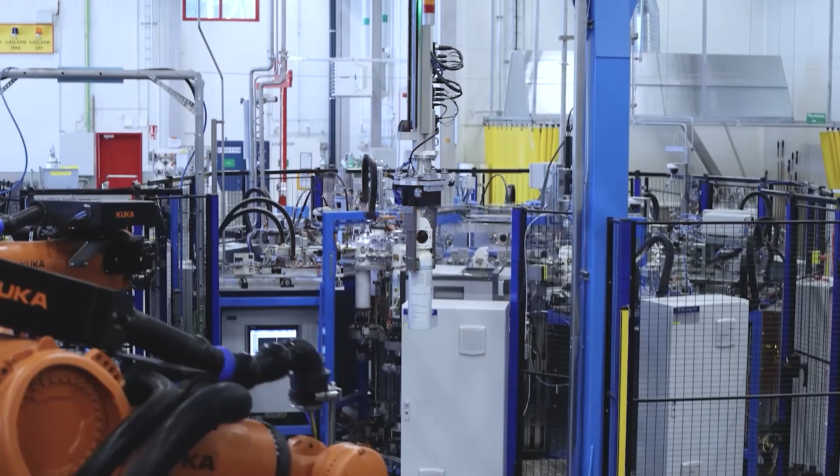Right, we've given ourselves 30 minutes to talk about a pretty big subject, so let's get stuck straight into the history, shall we? We have a long, proven, successful history of supplying gantry systems to various industries and hundreds of different types of applications.

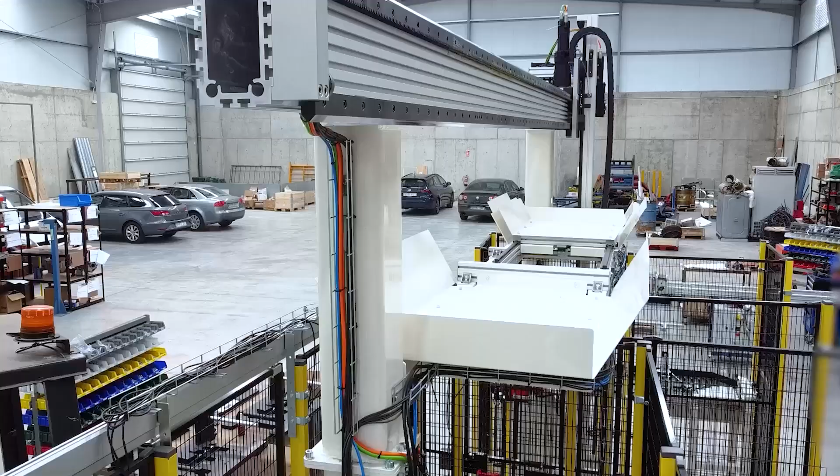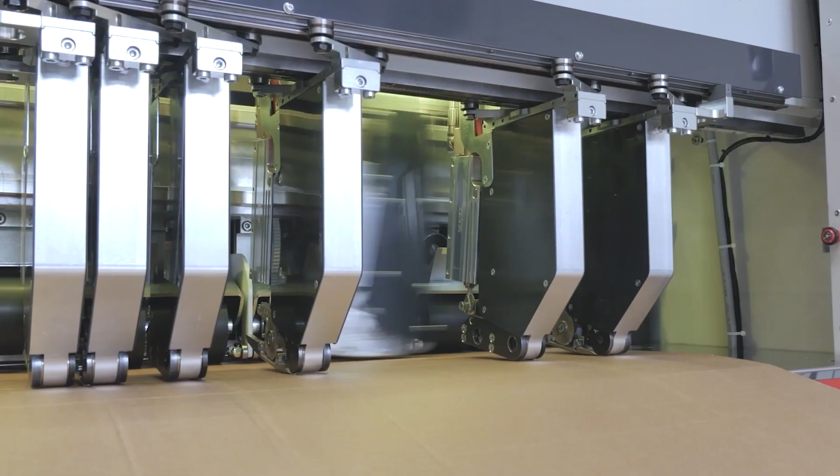One of the primary reasons for that is the overall success in terms of features and benefits of our V system. Yeah, so like you say, we've been doing gantry systems for decades now, built on our successful HDS and HDS2 products, a combination of components that we put together - beams, slides, bearings, carriages. We've been able to provide multi-axis systems. But as you say, it's all based on V-guide technology, which is the core of many of our products.

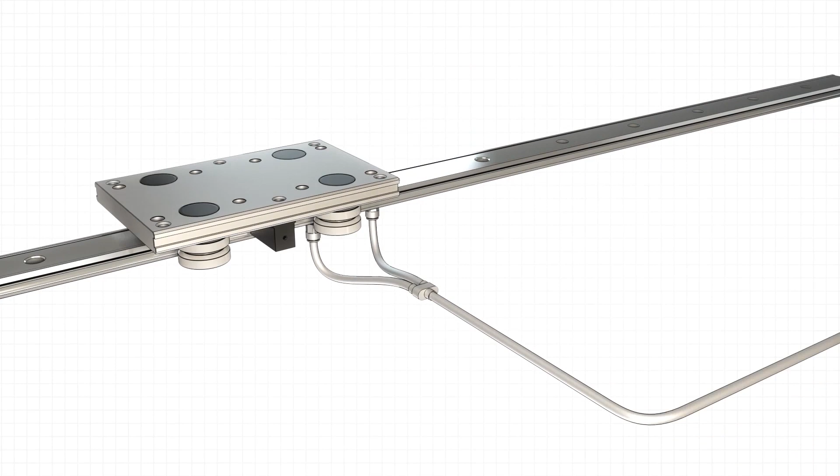For good reason. Absolutely, and it does provide a lot of inherent benefits to gantry systems. You've got to think about these things being 3, 4, 5 meters up in the air. You want it to be reliable. You want it to be low maintenance. You need performance, speed, acceleration, accuracy, repeatability, precision. Anything else?

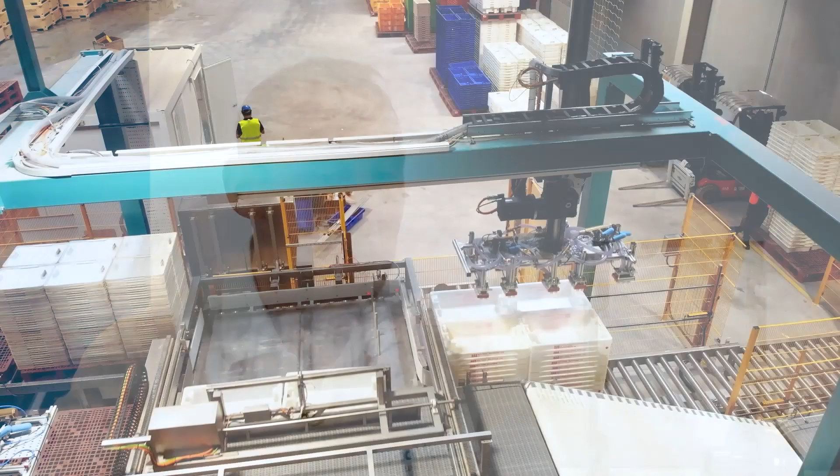Absolutely right. Yeah, well, again, in terms of the major axes on a gantry system, the value of a V system is there is no limitation to what that major axis can be, because of the compliance in a V system and the ability to match rails into much longer lengths. So it's a very compliant system in many different ways, and like you say, 4 or 5 meters up in the air, you don't want to be up there too many times. You need it to be durable, you need to be able to fit it and forget it, and so forth. The V system provides that, and that's one of the core reasons for our success in this industry in the past.

Yeah, absolutely. You don't want Fred going up his stepladder too many times to grease those bearing blocks, for example. No, we don't. No, absolutely.

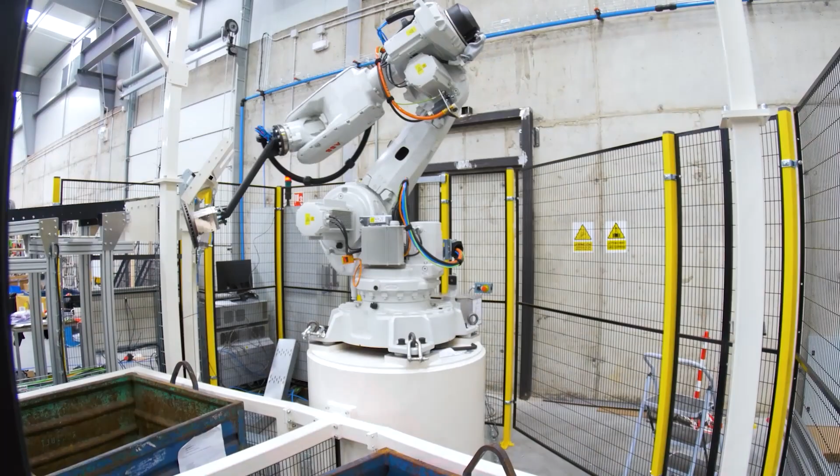Right, so Alec, we know about robots that pick and place and stack and do all sorts of things, and we know about industrial cranes. From your perspective, where do you think HDS fits in? Yeah, well, industrial robots are incredibly important in industry. We see them everywhere, all sorts of applications, all sorts of industries, and they are very good at what they do, and that is handling product, but within a given footprint.

So you may have an industrial robot that is handling 50 kilograms of payload within a 500 millimeter radius, but if you were to do the same payload within a 3 or 4 meter radius, then you're looking at a much bigger robot. A much bigger robot, exponentially bigger price, I'm guessing. Yeah, when they get big, they get expensive.

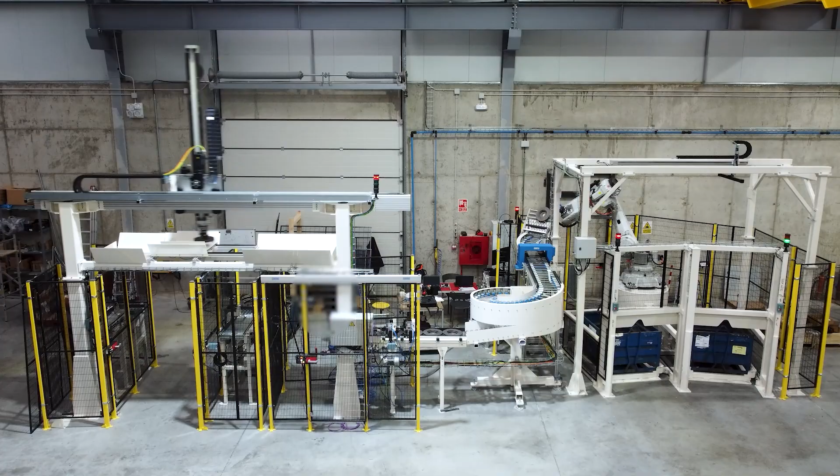Exactly. But what I'm saying is that a gantry system isn't to replace a robot. It's more a collaboration with a robot. We've done applications ourselves where we've had gantry systems that have had an industrial robot loading the gantry system. The gantry system does the legwork of covering great distances, maybe transferring the product between process lines, and you could even have a second robot that's offloading at the other end.

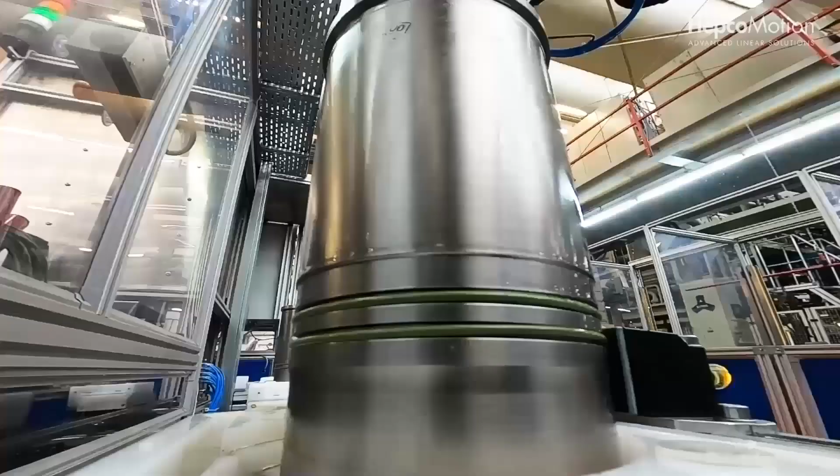Absolutely right, and I think what we need to remember with our gantry systems is they will provide the level of precision and accuracy, and even more importantly, repeatable accuracy that you can get on a smaller scale, and that you're certainly not going to get with something that could be described more as an industrial crane. So you've got robots that operate well in a relatively small envelope, and then you've got a gantry system that will absolutely revolutionize the size of that system, but without losing the precision or the accuracy.

We're seeing in industry today that automation is becoming all the more important. And with those levels of accuracy, repeatability, load carrying capacity, the gantry is really filling an important gap. We think it's probably an increasing part of the industrial market.

Quite frankly, our R&D guys have put a lot of time into making our offering as good as it could possibly be. I think we've taken it to the next level.

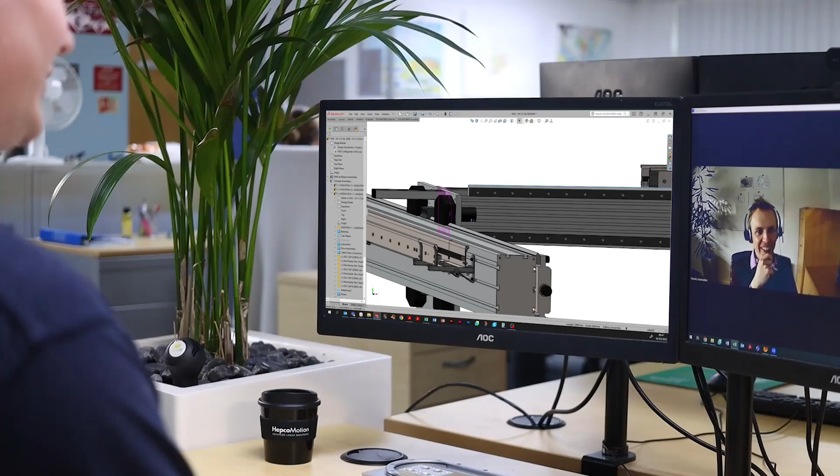First of all, let's just look at what our R&D guys were trying to achieve. First, they wanted to improve the customer experience. Customer experience is the amount of time taken from initial interest to the point where they have all the information they need to make a decision to take a project forward.

On top of that, we looked at safety in two ways: additional components to our HDS systems that make them safer, and also the level of information and data we can provide our customers for the certification they need for their machinery or whatever market they're in.

We looked at standardizing everything better if we could, in terms of standard rail lengths and standard joint positions, because standardization helps with the two other things we were trying to achieve: cost, keeping it as low as possible for us and our customers, and lead times. We supply a more standard product, so lead times are beneficially lower for that reason.

So that's what we set out to do. I think we did it very well. Let's go back up to the first one, the customer experience, and you're going to talk about the system configurator.

Yeah, and I think the team here at Hepco really have knocked it out of the park in that respect, and I think it's safe to say we're offering a really unique experience.

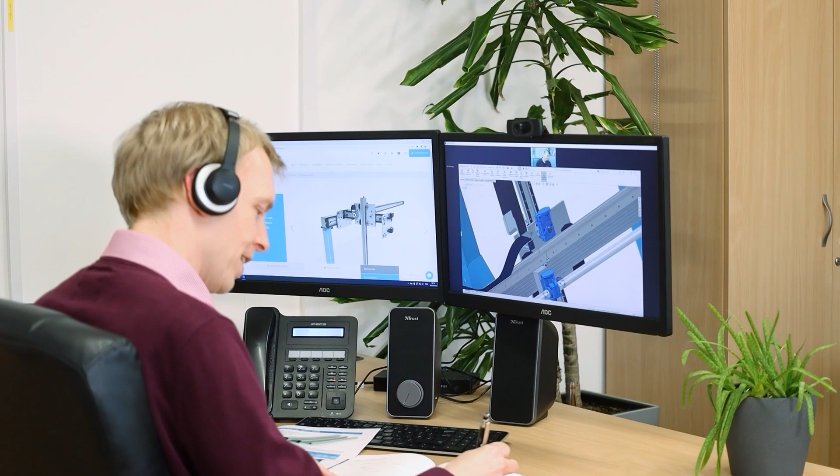The way it's set up is that it will involve one of our highly skilled sales engineers, an internal applications engineer, and more importantly, yourself, the customer, in an online virtual meeting, whether it's Zoom or Teams, and we'll talk you through your application.

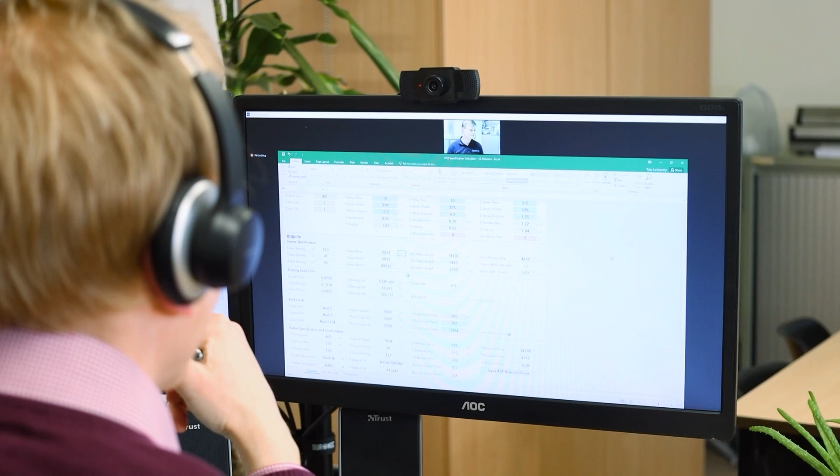So we need to understand the basic parameters such as load, speed, required cycle rate, throughput, etc., required accuracy, deflection, environment. Do we need to use stainless steel rails and bearings, safety?

These are all questions that we ask every day. Anybody comes to us and says, look, what's the best system for my particular application? We ask these questions - they're not rocket science. Most of the time customers will know what they want, or more to the point, very often customers will know what they need to achieve.

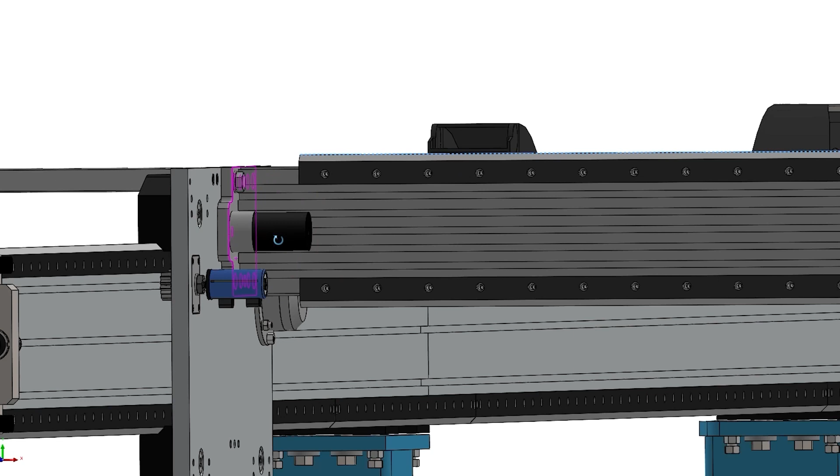By hand-holding from day one and walking the customer through with specific questions, needling out what we need to know, we can go from there to there very quickly, to a point where we're offering quite a lot. During this online meeting, the applications engineer will be entering this data into our configuration system.

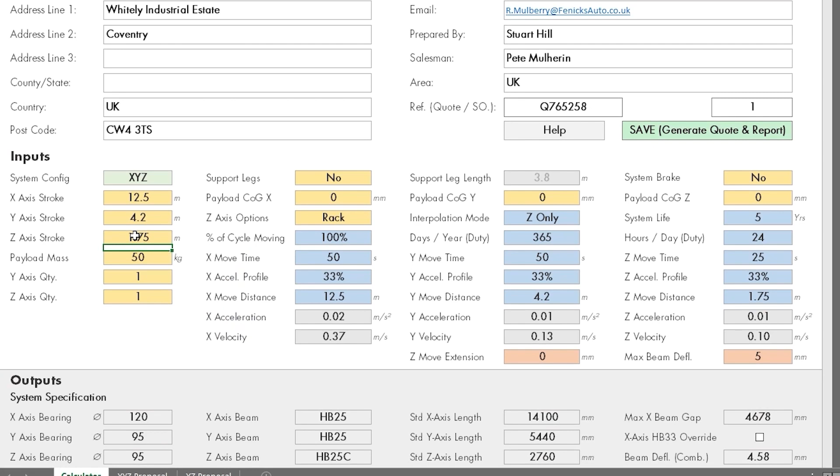And we take into account things like your factor of safety, and ultimately that will provide us with a lot of outputs in terms of specification of the size of beams we need to use, slides, bearings, etc.

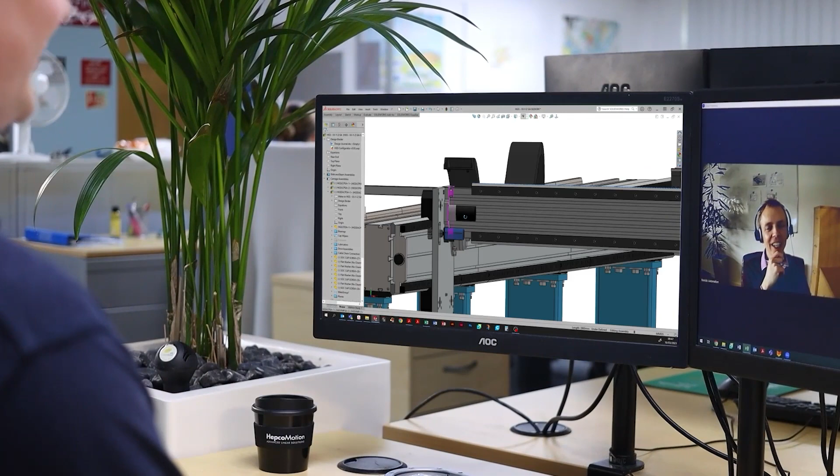So it will generate a full specification, even down to gearboxes. It will take into account torque, speed requirements, all that sort of thing. So it really goes down to the finest detail in terms of spec of the system.

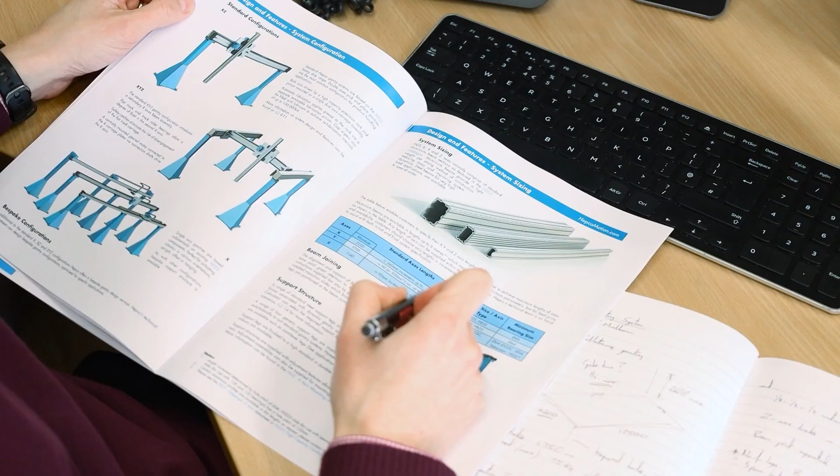But what it will also do is generate a full package of data relating to the load life capacity of each individual element within the system. So we're going down to bearing level, and we give you basically a load factor for each of those elements.

So based on your required life, based on your required factor of safety, we come up with a specification, and we've got all of the data to back that up, which you can use. If you're in the UK or Europe, you can use that for machinery directives or your declaration of incorporation, CE marking. But even if you're outside of these areas, you've still got access to that information, which is incredibly valuable.

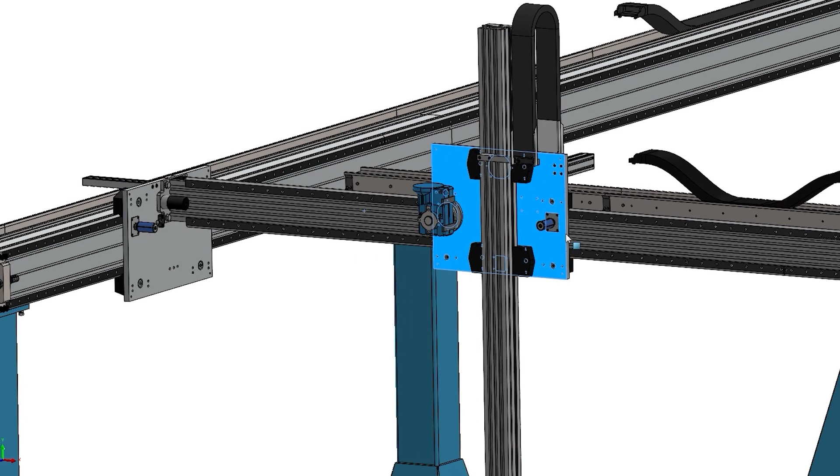The other thing it does on the spot is provide you with a quotation, so you've got a price. On top of that, it will also generate a fully generated 3D CAD model that you can drop into your process line design. Whether you're using SolidWorks, CATIA, etc., we can generate the file to suit you.

So to clarify: fully comprehensive specification and quotation, CAD model, and a full technical report on system life of each component and so forth. We think that has definitely taken it to the next level, and we do think that is absolutely unique.

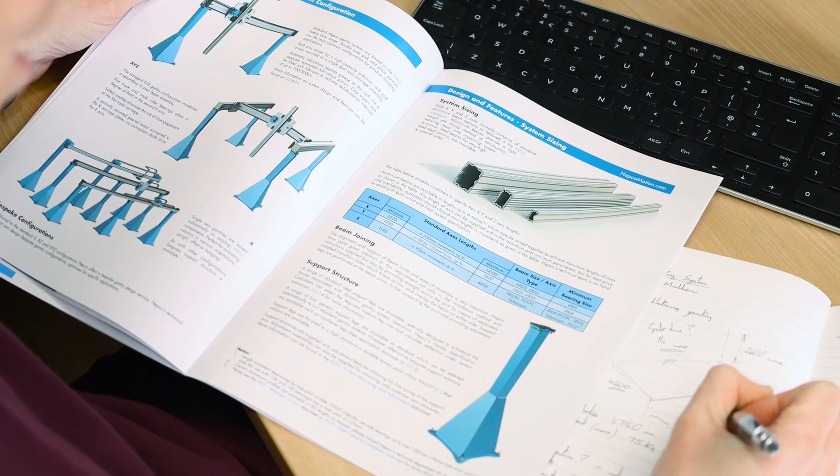What that gives us is, from a very initial point of interest, we are able to provide the customer with what they need to make a decision and move forward in a very short period of time. We're talking a day now instead of weeks - a profound improvement. Our R&D team have worked very hard on this configuration tool to provide that level of service, and we think it's a game changer.

Just a quick question - I thought the payload was 250 kilograms. Turns out it's 275, and the speed isn't 900 millimeters per second but needs to be 950 millimeters per second, because the overall production output needs to be slightly higher. Alec, do we need to start from scratch?

We always love it when the goalposts move. But fortunately, with this new system, the data is saved, and if there are tweaks that need to be made, that can be done relatively quickly. We can repeat the process of generating the quote and the new model in a very short space of time. So it's incredibly flexible, very powerful, and we can customize it to exactly your requirements.

Superb, absolutely superb. Going back to the list I mentioned before, customer experience was first. The second was safety, and I think we're better off discussing how we've made our system even safer by going through the various product enhancements our guys have come up with.

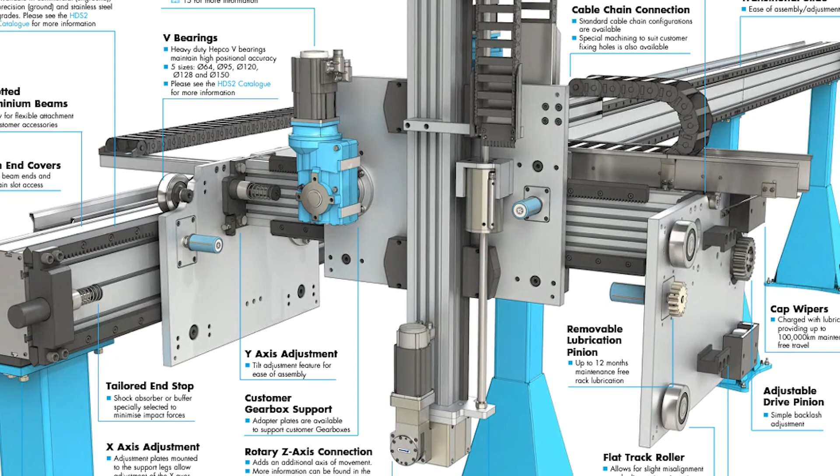So if we start at the top of a list of nine, that would be the X-axis and the ease of assembly of the Y-axis onto the X-axis. Over to you, Alec. Yeah, so we've listened to feedback, which has all been very useful in developing this product.

The configurator is one part of it - that's your pre-sales part - but the optimization doesn't stop there. We've looked at the product and really considered how we can make it as easy as possible for you when it comes to installation and maintenance.

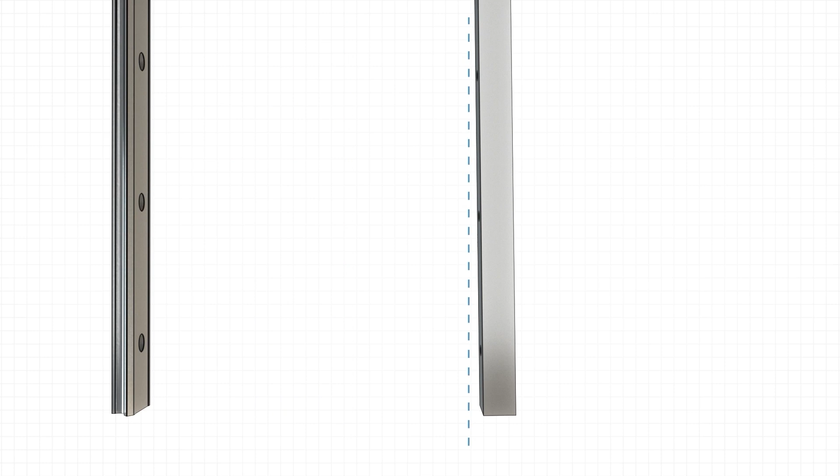So before, we were looking at the X-axis - if you've got an XYZ system, you'll have two beams running in parallel for your X-axis. One will be V-guides, the opposite side will typically be a flat track roller guide, because it gives you that compliance, meaning you can set your beam within a few millimeters. It's not critical, and it allows for fabrication tolerances, factory tolerance, and a whole host of things as to why that's a good idea.

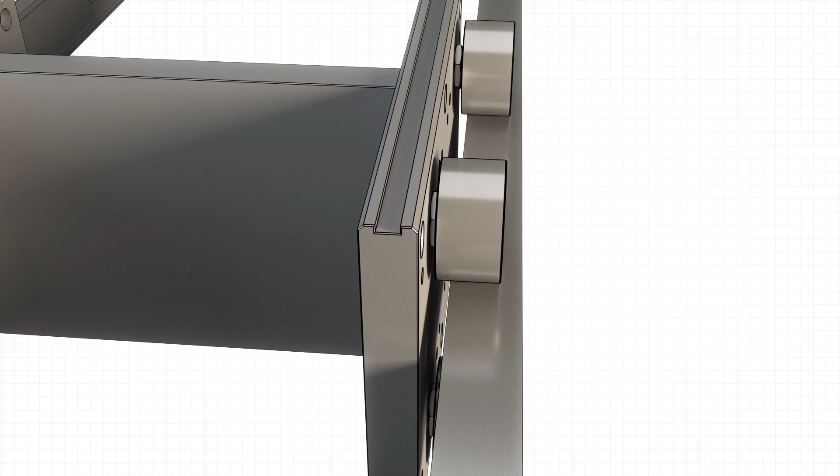Yeah, so it's a great idea, but when you're trying to mount that Y-axis in place, you have to accurately position it over the V-guide and over the track roller while lifting it all up. And that's usually up there - might be 6, 7 meters long, might weigh a few hundred kilograms, and you've got to try and align two ends and guide it over these slides. It's so finicky - it's a challenge.

So we've looked at that, and now what we can do is basically have the X-axis carriages mounted to the beams in advance, so they're already up there. The Y-axis beam assembly now includes some adapter mounting plates which allow you to interface with those carriages. In addition, there's a location pin which drops into a V, allowing you to basically drop the Y-axis in place - that gives it its initial location seating. Put your screws in the mounting brackets, and then you've got a nice little alignment feature which allows you to adjust the tilt on the beam to make sure it's perfectly vertical.

So there you go - you just drop the Y-axis down and then make your finite adjustments, including tilt, after that. That certainly is a considerable improvement on previous methods and other methods I see out in the marketplace. I'm also a fan of the new X-axis catches that we've instigated.

The catch in itself, because effectively what you're doing, we've considered safety as another fail-safe. It's very much a safety feature, based on feedback there's been concerns. What happens if one of those never events happen? Some doomsday catastrophic scenario, such as a forklift truck reversing into one of your gantry legs. It knocks everything out. You've got V-guides one side, flat track roller the other. In that event, there's really nothing to stop that roller side from disengaging, and then all of a sudden your Y-axis is succumbing to gravity.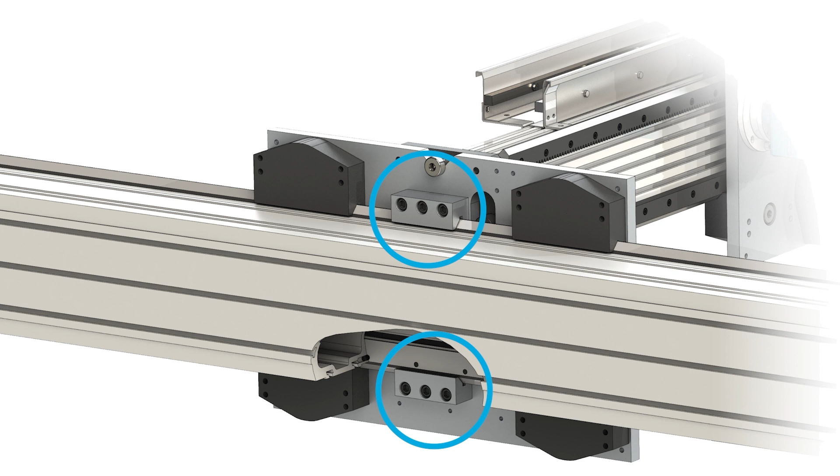Okay, so that protects the system laterally speaking, across one of the axes. How about system protection in terms of going off the edges of the system, Alec? We've always had end of travel buffer systems, but we've taken that to the next step now. Going back to the configurator, we ask what your factor of safety is, and we basically allow for the Y-axis with subsequent Z-axis and payload crashing into the end stops, at full speed.

What we don't want to happen is a failure and for stuff to come off the end of the beam. So we've looked at this in a lot of detail, and we've improved it by, instead of mounting these brackets onto the aluminium beam, we're now screwing and mounting into the steel slide, which is obviously much stronger.

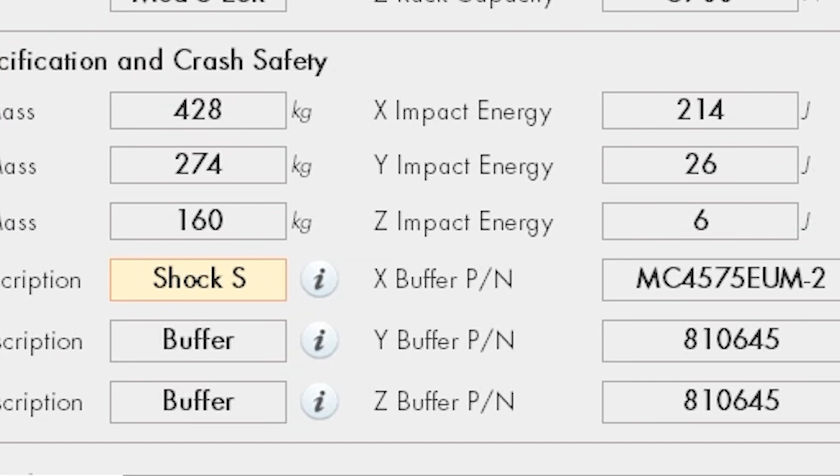And those buffer devices themselves, there are four options. One is a rubber buffer, and then about three sizes of shock absorber, depending on the payload and speed. This is factored in on the configurator, where we qualify what the maximum impact energy might be, based on speed and inertia and all that, then add the safety factor or level of safety the customer is looking for, and automatically the configurator will calculate what the correct end of travel system needs to be adopted for that system. Absolutely fantastic.

Okay, thank you, let's stay on safety. Let's move to the Z-axis, the good old important Z-axis that's always fighting gravity as well as everything else, okay? Oh yes, things fail, motors, gearboxes, pinions - these are invariably rack and pinion driven systems. Something like that fails, even a control system, loss of power, things can plummet down.

So we've come up with essentially the Z-axis brake. Tell us more about that then, Alec. Well, I think it's fair to say these failures don't happen often, and it generally involves some sort of external forces that cause these dramatic events. But you're right, if there is a crash and you lose the teeth on the pinion, there's nothing to stop that Z-axis from dropping to the floor.

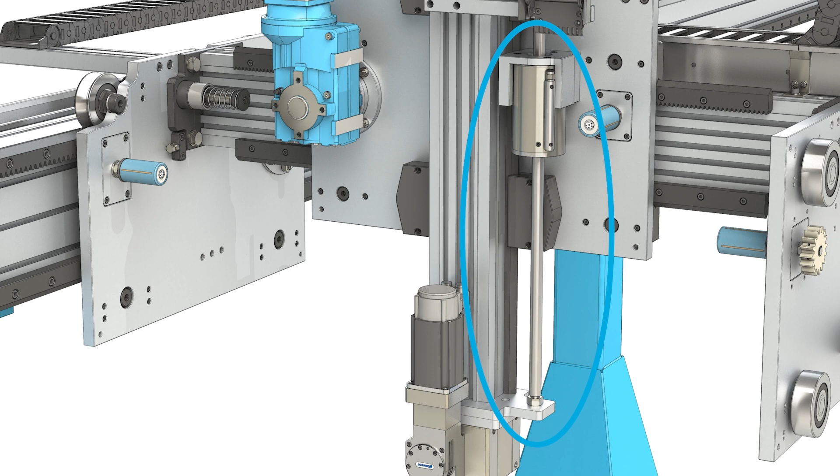So we've incorporated a new Z-axis brake system. It's a secondary system that runs alongside the Z-axis. It comprises a ground shaft solution with a taper lock pneumatic brake. In a power out situation, it will fail safe, so it locks the system up. Equally, if acceleration exceeds a given limit, it will lock and arrest that Z-axis and prevent it from crashing to the floor. So it's not intelligent, but it will identify that something's in free fall essentially, and it will grab it.

I've got a feeling that's going to be a popular choice going forward, but again, it's one of these things going back to the system configurator where we provide the option at that time. You can go back, change anything at any time, but it's a question we ask for very good reason.

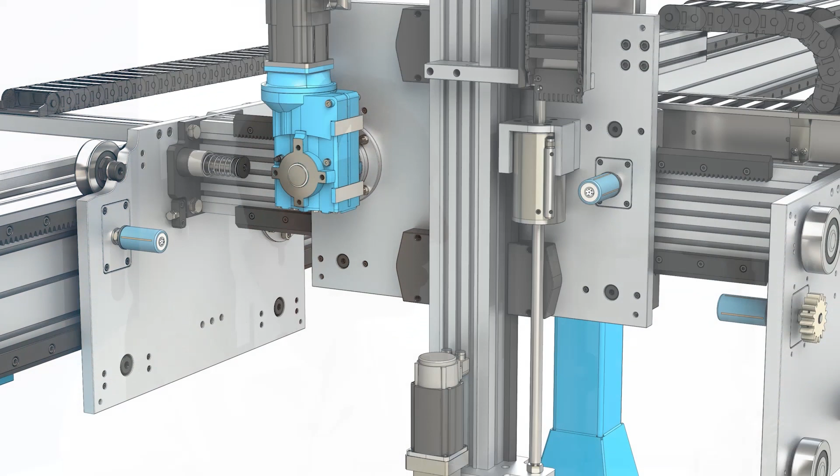Staying on the Z-axis, I'll touch on quickly the additional rotary axis that we're now offering, the end of beam rotary axis, which provides a full 360 degrees of travel when it's required. What that does for us is it provides the opportunity to give the customer the complete mechanical solution. So rather than supplying everything up to but not including something, the full mechanical solution is within our remits, and we'll touch on some other elements, but we've got two more things to talk about on the Z-axis - one is the telescopic system.

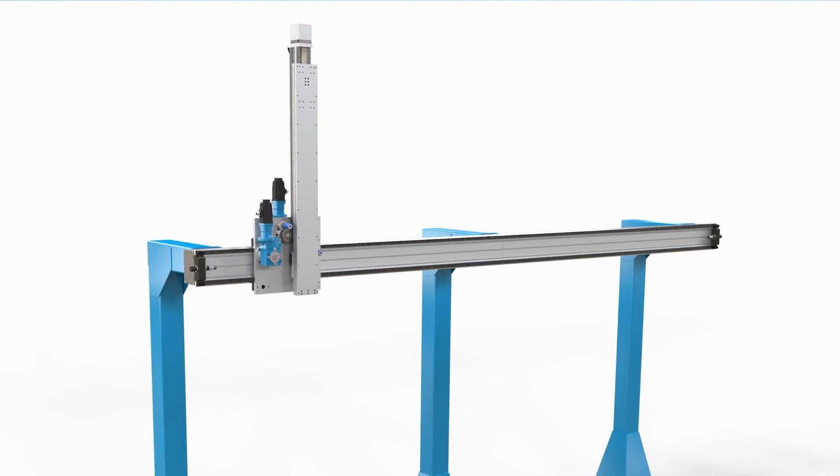One of the challenges our customers sometimes face, particularly in older buildings, is lower head height and low ceilings. In that situation, the telescopic Z-axis can save the day. It has a lower overall head height but can still achieve a decent amount of vertical travel. It's a multi-stage construction, not always required, but very often required.

I think we've probably both been in situations where a telescopic axis is definitely required. Sometimes it just saves the day. Yes, it does.

One other thing on the Z-axis: DLS, one of our most proven and popular ranges over the years. A long time ago, we brought out the cantilever DLS option, where the carriage and motor are static and it's the beam that's the moving element. The advantage is that when the beam moves out of the way, there's nothing there, leaving a complete space. The DLS3, DLS3C, was great, but we could do more capacity.

So what have we done? The DLS3C is a great concept, as you mentioned. If it ain't broke, don't fix it. So what we did is take it to the next level, incorporating that design within the framework of our larger DLS5. So you've got the DLS5C, again a belt-driven system with a static carriage and drive system and a dynamic beam.

That allows us to move from the 4 or 5 kilograms the DLS3C is capable of lifting up to about 20 kilograms, while still maintaining good dynamics. We could potentially go a bit heavier if we slow things down. Everything depends on speed and, more importantly, the accelerations, but as a general rule we're increasing the capacity by a factor of 4 compared to the DLS3.

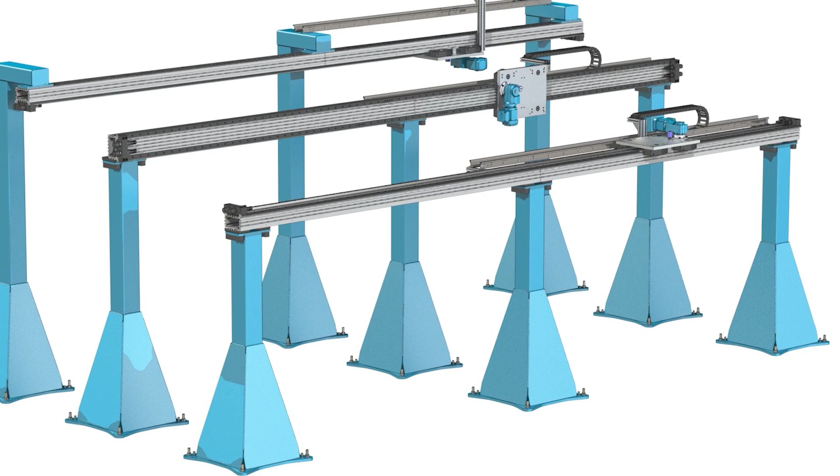These are all quality of life additions we've included in the range. The legs can be configured in terms of their height, sized according to your deflection requirements, and they include an adjustment plate as well, so we can adjust that beam height and level.

The X-axis beam - it really gives you that extra option. And like you say, cable chains, you've got to manage your cables somehow, so we need to know the number of cables, the sizes, and that can all be sized and included.

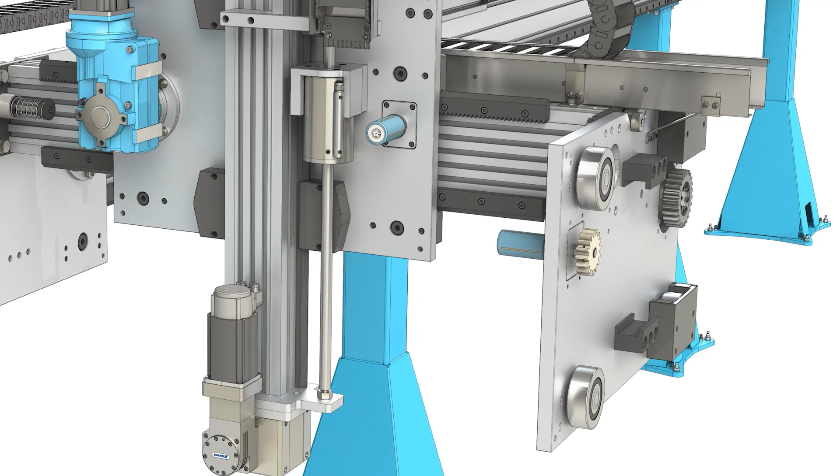There are other sorts of additions - gearboxes can be supplied. Going back to quality of life changes, the lubrication pinions are now fully removable, and we've also got automatic lubrication options. So it really does give a complete mechanical solution.

Fantastic - I think that's about 30 minutes. We could easily talk about this subject for 2 hours, but we're out of time. I'm hoping that what we've managed to cover is the customer experience, the safety, and the cost and time savings that we set out to cover. We will absolutely look forward to answering any questions you guys have for us. Thank you for your time so far.